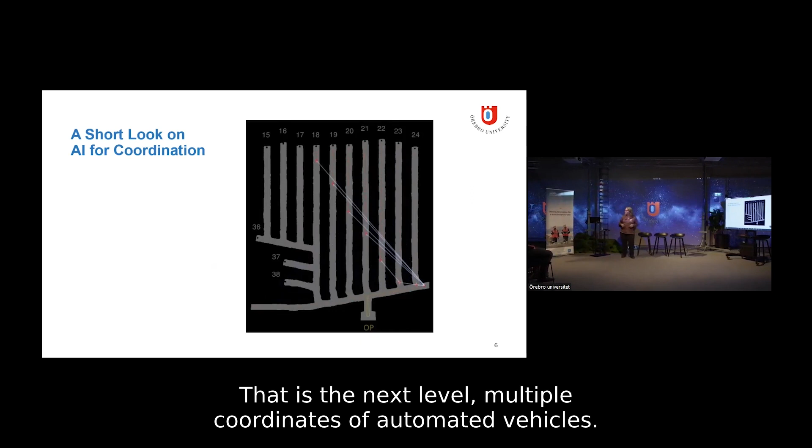Now that's the next level. You coordinate multiple autonomous vehicles. And the principle behind that is actually some kind of dynamic geofence. You predict where each vehicle will go, the envelope. And with this prediction, you know where every vehicle will go, you can identify conflicts, and then you can tell at the local level: you have to wait, you can go.

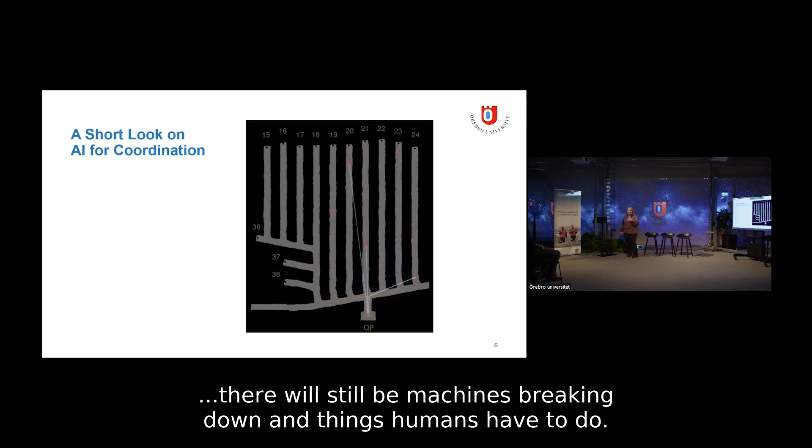So, I think I will end with that. Here you have the autonomous vehicles of the first panel, and you have the human factors and involvement of the second panel. My last word is basically: enjoy the workshop.

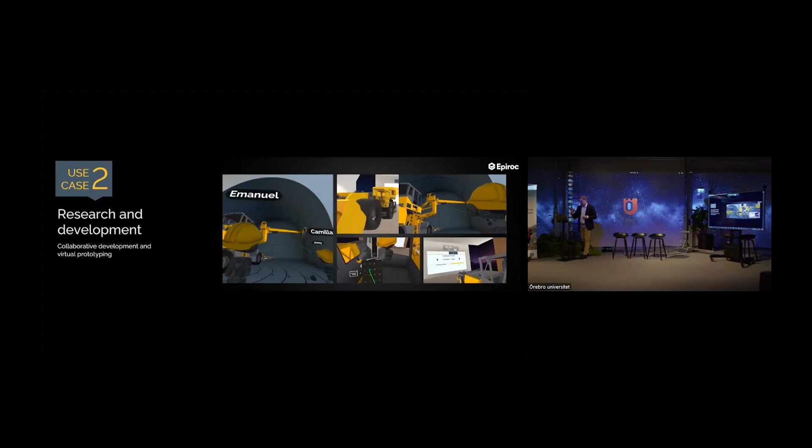Then we saw, why can't we use this when we develop our new products? So this is actually, you can see it a little bit, a new product for us. We started to develop that one in VR before we even made any kind of CAD development.

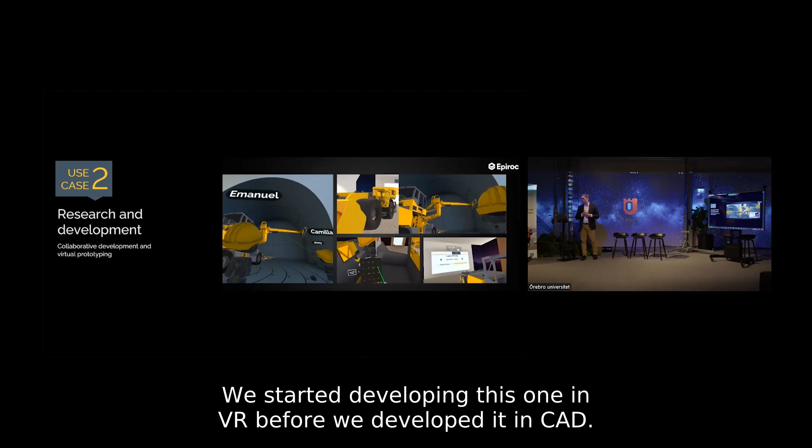The benefit from this is you can collaborate wherever you are. So we have teams from the US, from China, from India, collaborating with teams here in Sweden. We can also try out a lot of different concepts.

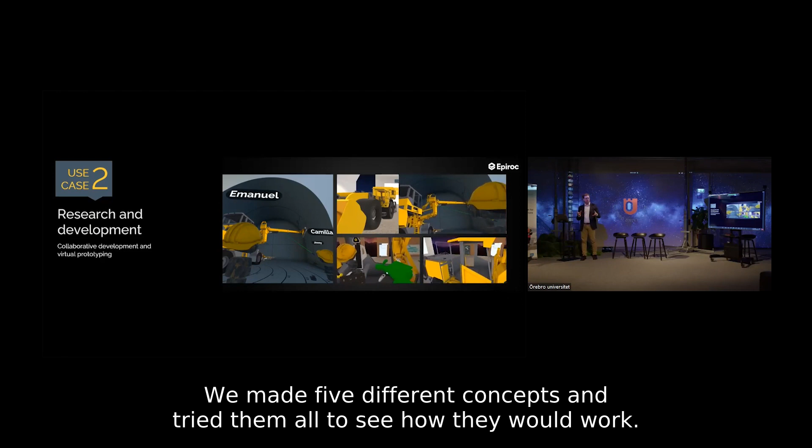That's what we did. We created a number of concepts. For instance, for the cabin, we made 5 different concepts and tried them on the machine to see how they would work. 4 were a bit traditional, and the 5th one was wild and crazy.

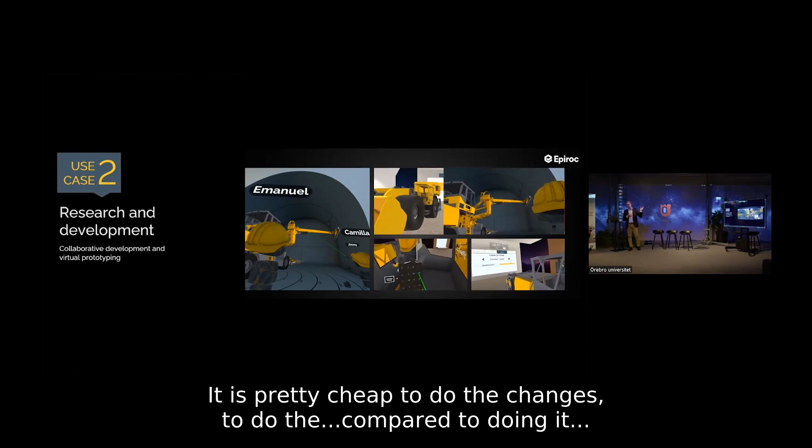So we tried it, and now that's the one we are doing—wild and crazy. We would never have dared to do that if we hadn't tried it. It's pretty cheap to do the changes and concept tryouts compared to doing real hardware. We still need a hardware prototype, but it helps with getting everything right the first time.

What we could also see is that the innovation level rose when trying out concepts this way. The people working on the project came up with a lot of new, fancy, great ideas that we are actually implementing now. They all say they would never have dared to do that if they hadn't done it in VR first.

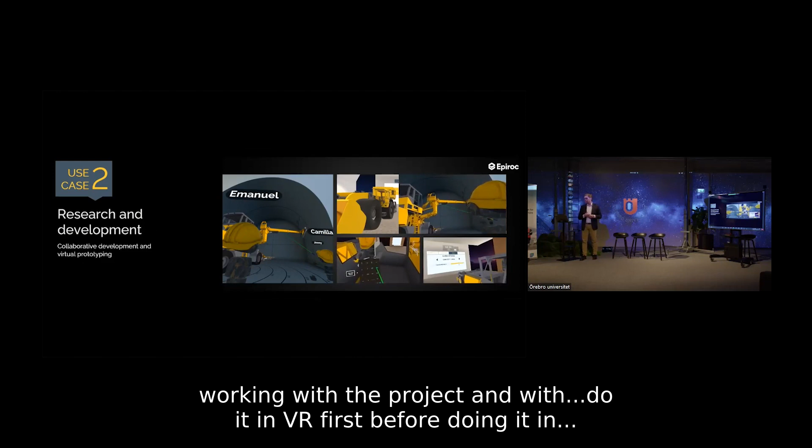And that's a bit tricky to do, especially on a distance teleremote. So what we did here is use the video stream that we have on the machine. We also had a high definition LiDAR that scanned the mine very thoroughly, and a high-speed update that creates a digital twin of the mine in real time. Finally, we also added some AR features to help the operation, and all of this is overlaid on each other and shown in VR, the virtual reality.

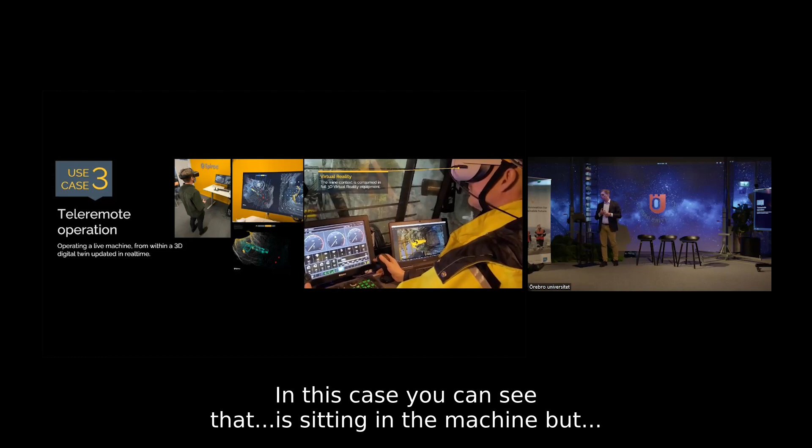I cannot show that thing. There are some secret features in that one. So we'll have it shown some other time.

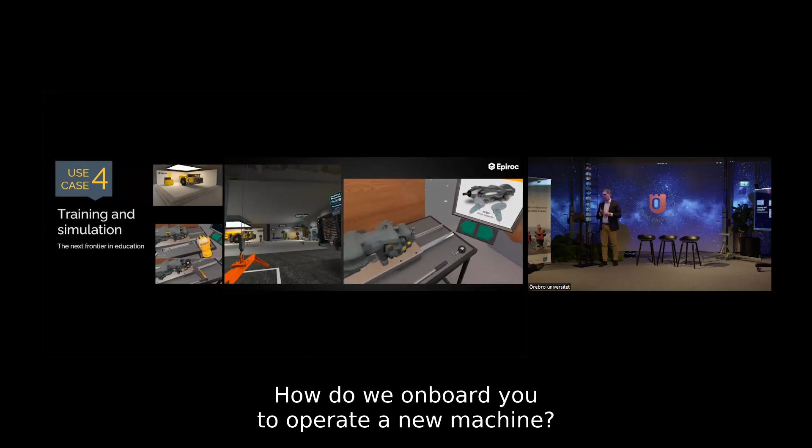Finally, and this is where we right now have a lot of interest, is training, of course. We can see that there's lots of interest, both internally and from our customers, for onboard training. How do you onboard a new operator into a new machine? Because the machines our customers are buying are in production, so it's difficult to get access to the machine.

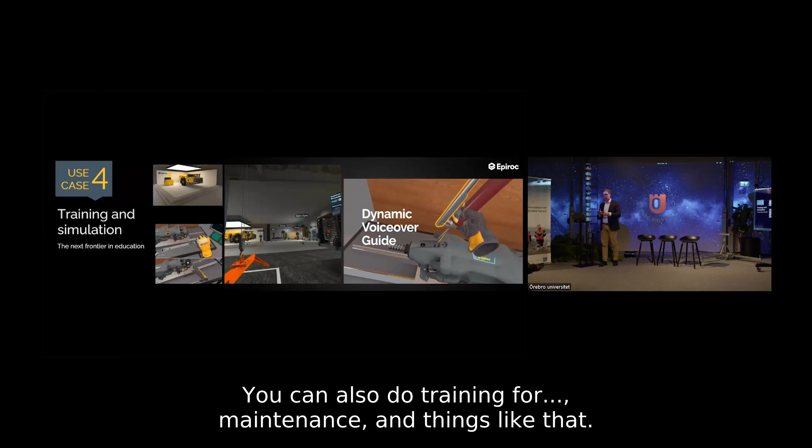And then you can do the onboard training virtually. You can also do training for daily maintenance, vehicle maintenance, monthly maintenance, and things like that. And also for the service technicians, how do I do the service operations? You can do that training in the virtual world.

The one you see in the middle there is a battery swap, how we swap the battery in our ST14 machine. Some of our customers have tried that. They say that the people who have done this training go directly and make the change without any training.

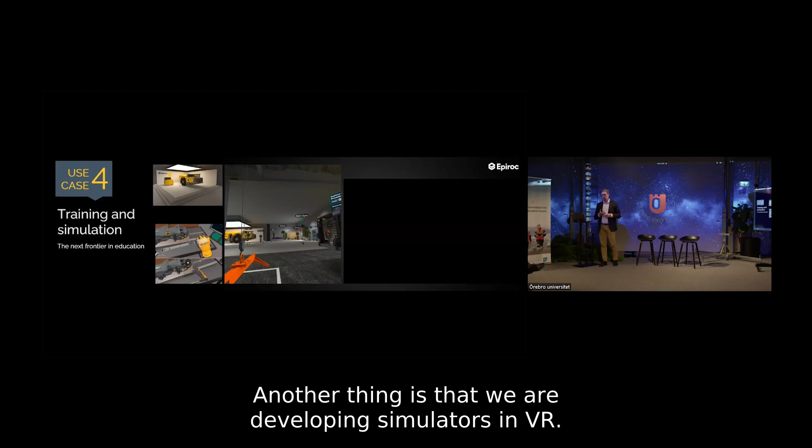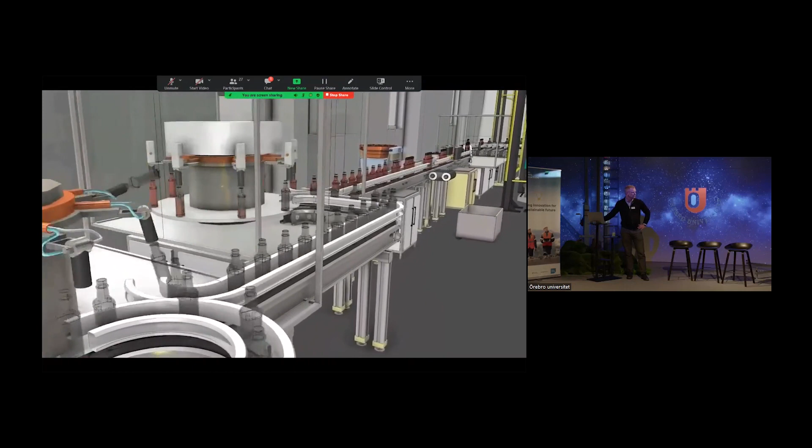So these kinds of projects we are bringing to the small and medium enterprises in the region, even with what Epiroc is doing, with all those things. So we're establishing this with 5 more nodes in Östra Mellansverige, and in Växjö also we have one.

We are doing pilots like this. We've done 20 of those pilots for different companies. We also do education, experience and competence activities, workshops together with companies to strengthen them. And also the hardware - we can offer visualization labs, displays, and a visualization center project.

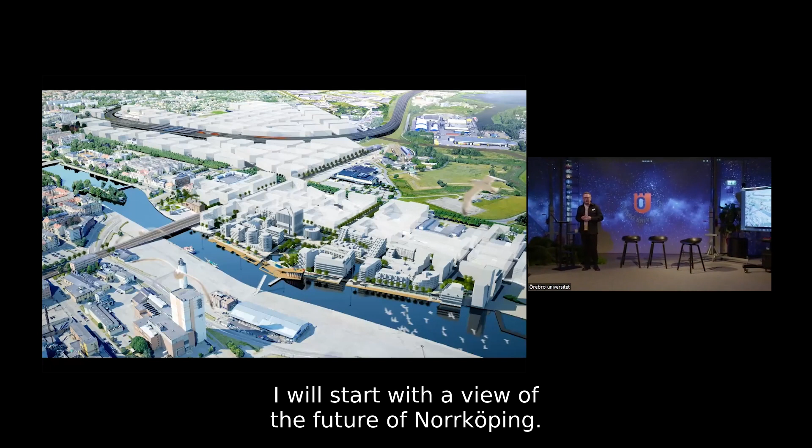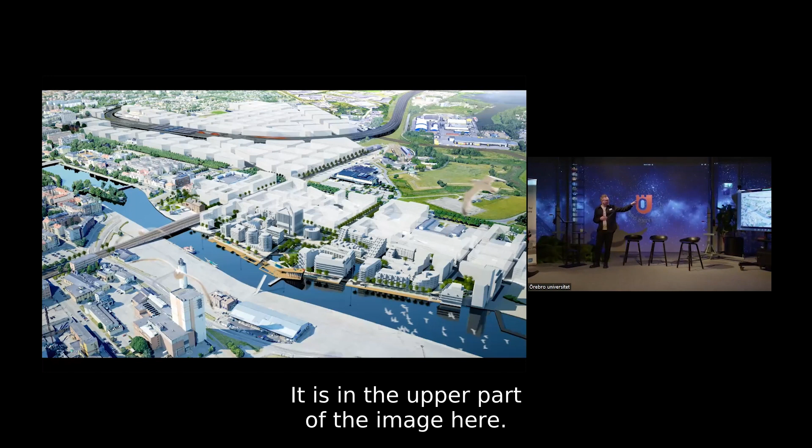Digital Twin of Norrköping - it's a project, it's ongoing. I will talk a little bit about the crossing point where AI meets visualization. I will start with a view of the future of Norrköping, the city of Norrköping. Like many cities in Sweden, Norrköping is growing, mainly because of that new high-speed railway, Ostlänken - that's the part in the upper part of the image here. And in the lower part is the first phase of that new development, called Empower.

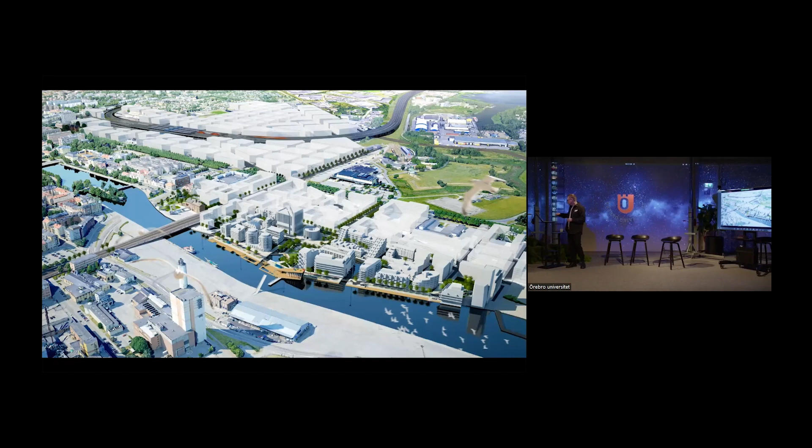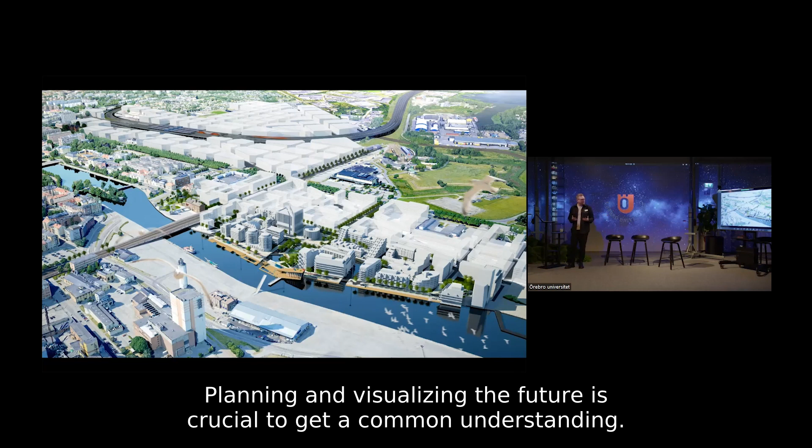Working with urban planning, visualization, and to visualize the future is crucial, and to get common understanding. But when you work in urban development, you cannot avoid handling the past in many ways. In this particular site, there has been a gas plant, located there to give light to the city and also for the city's factories.

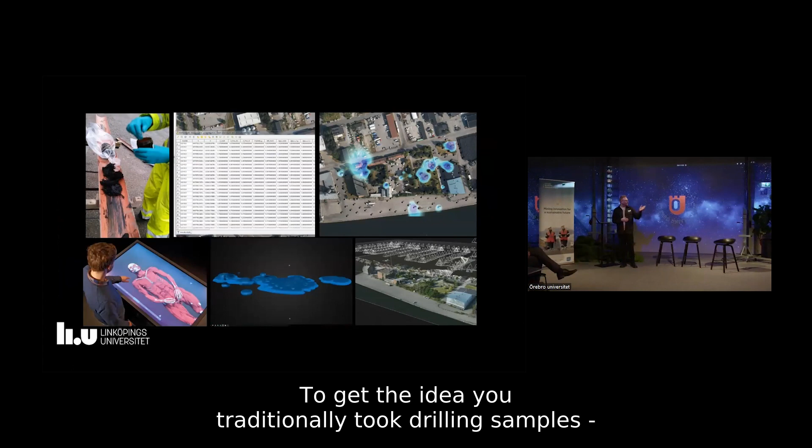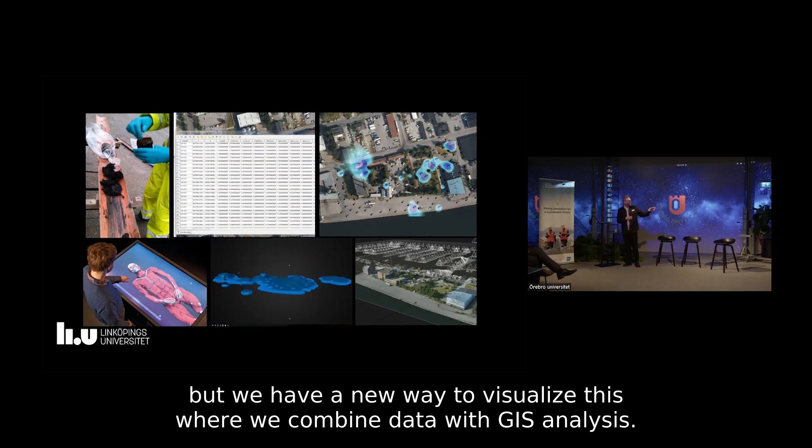There is some complexity to understand how this is spreading underneath the ground. To get an idea of that, you take drilling samples. We take a new way to visualize this where we combine data and do GIS analysis, but we visualize it in a way traditionally used for human autopsies in a virtual way. So we use the same medical technique to visualize how pollutions are spreading under this area.

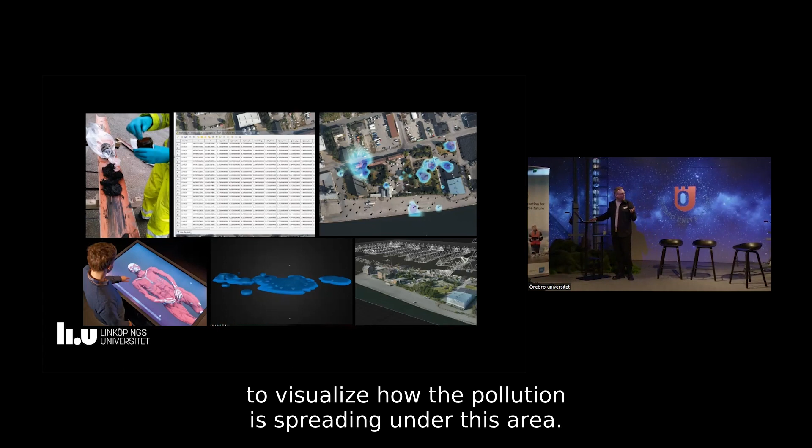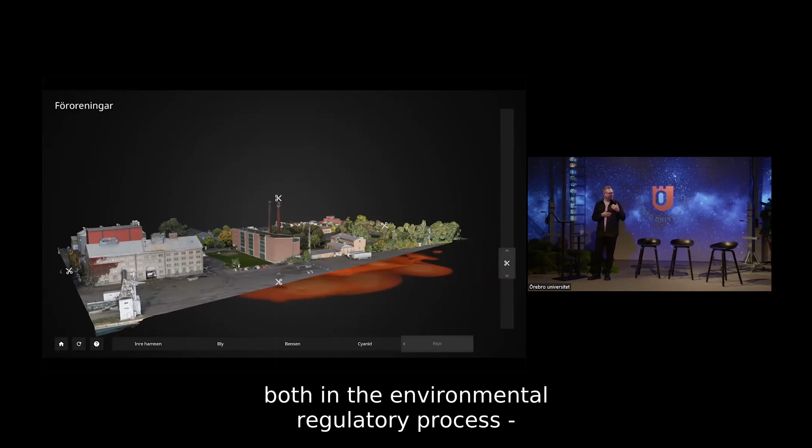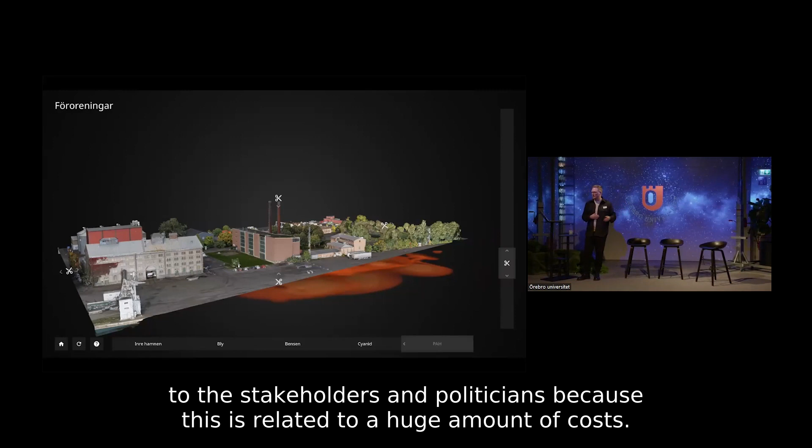In the end, we get this interactive way where you can virtually autopsize the earth and take a look at what's down below, what's hidden there. This helps to get a common understanding, both in the environmental regulation process and to the city stakeholders and politicians, because this is related to a huge amount of cost. So that's one way of working with visualization to get a common understanding about what's underneath the ground.

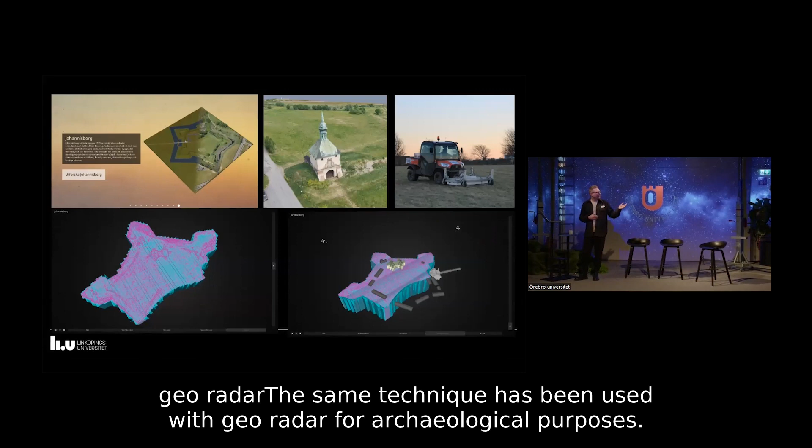And the same technique has been used with georadar, for archaeological purposes. That's also really important when you develop the city. You come in contact with archaeological sites, and that's also related to a large amount of costs. You need to be more precise about what areas you need to start digging and doing examinations in.

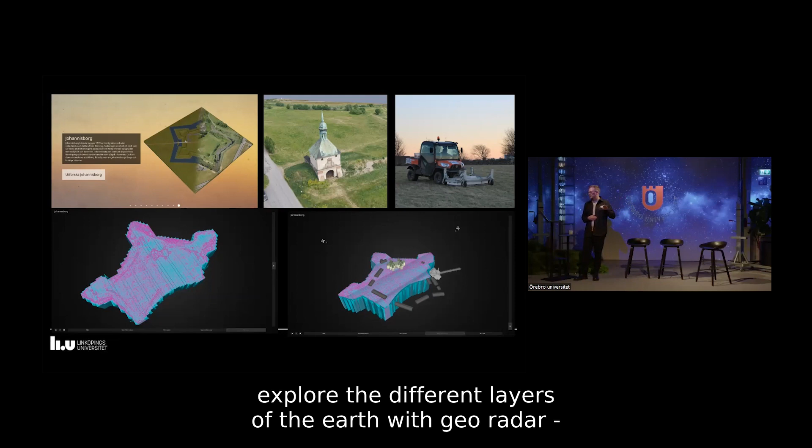We've supported that workflow by visualizing and being able to explore the different layers of the earth with georadar. You can visualize that in 3D, combining it with road inventories as well as historical models, so you get a really clear image of how these different layers relate to each other.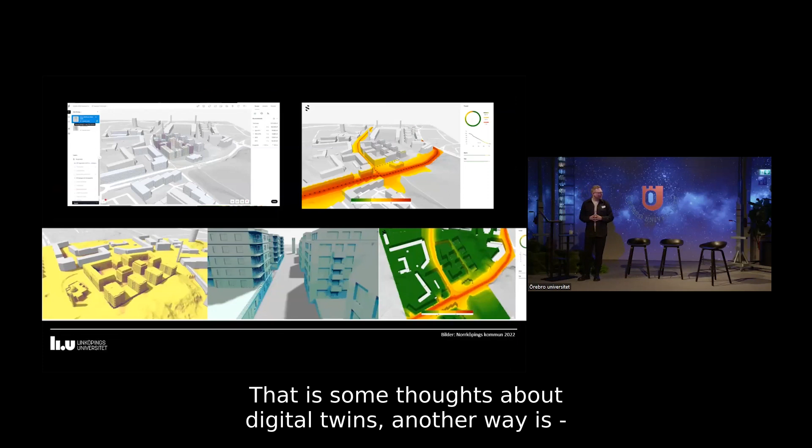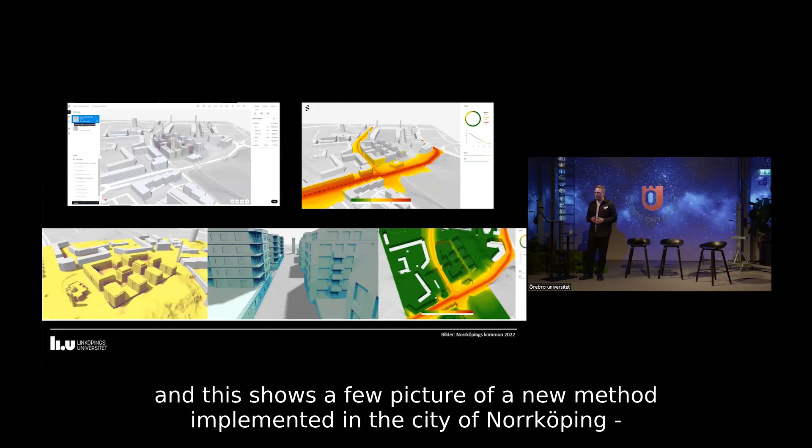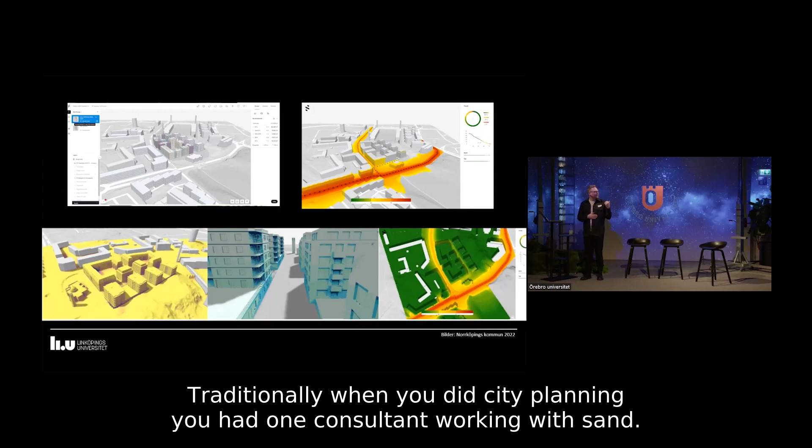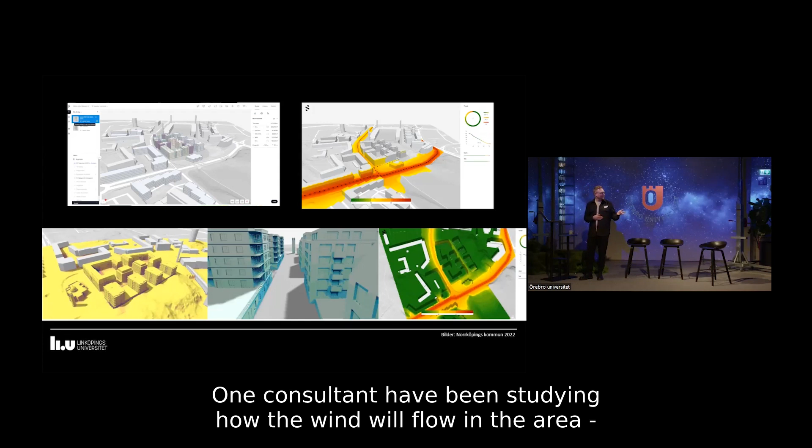And that's some part of digital twins. Another way is working with digital twins as a way to develop the future city. This shows a few pictures of a new method implemented in the city of Norrköping in urban planning, where, besides how city planning has traditionally been done—one consultant working with how an area will be affected by sound or noise from roadways, one consultant studying how wind will flow in the area, and a third studying how sunlight will be affected in the area—

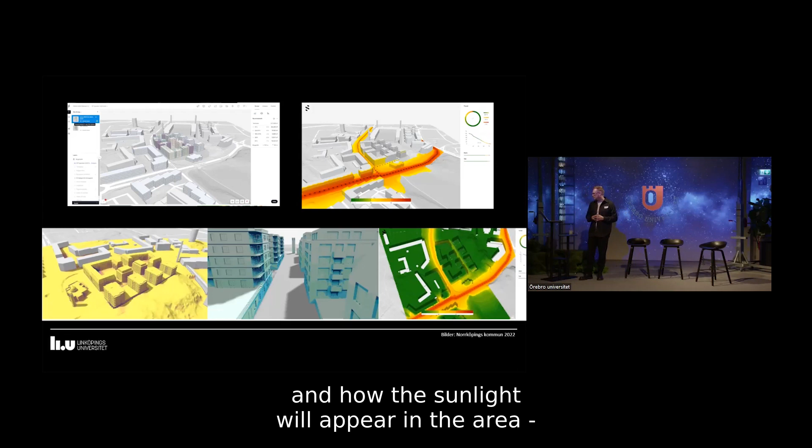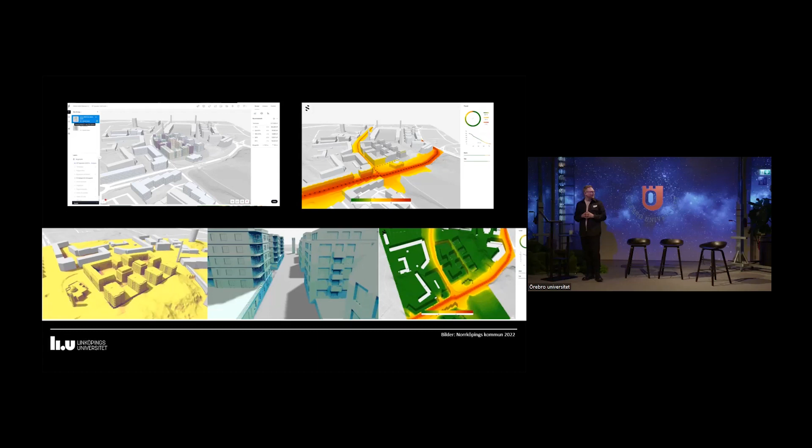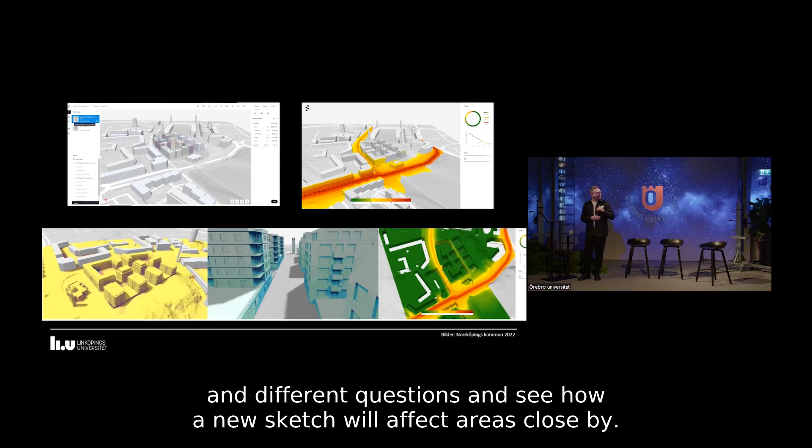new AI-powered tools help us analyze these different questions in real time and see how a new sketch will affect close by areas. This is where I think digital twins really show their strength, where you can ask cross questions.

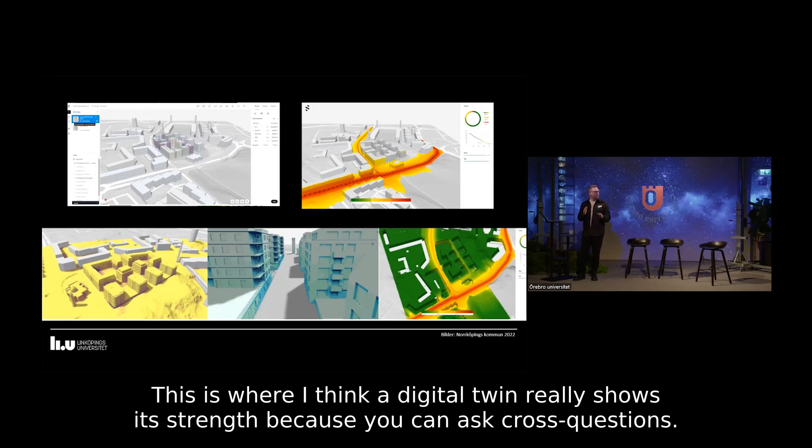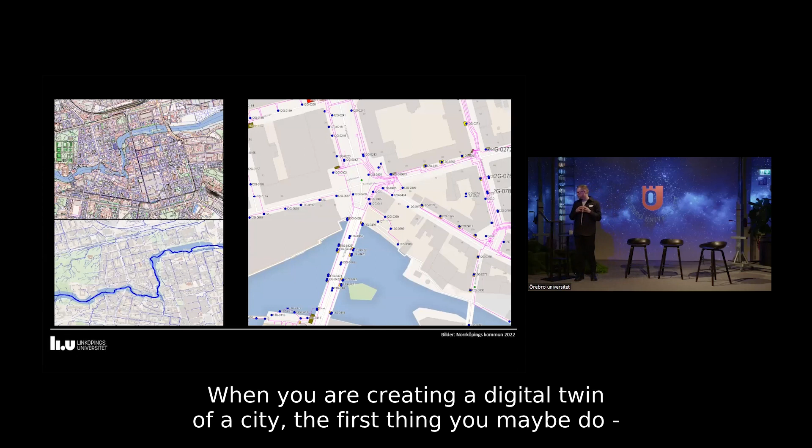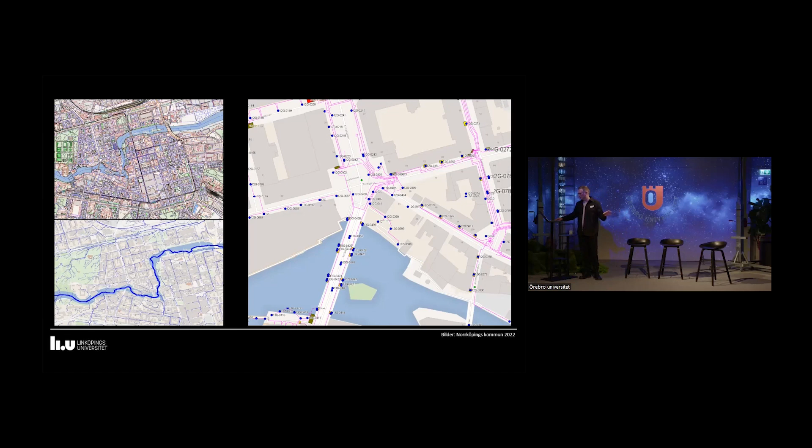When you're creating a digital twin of a city, the first thing you maybe do is take part of the city's data, data owned by the municipality, and that data is really high detail—from overall overviews to really detailed data. The right image here shows every lamppost, and you can click on those blue spots and see what kind of lamp there is and when it has been exchanged, and so forth. So it's a really complex data set, but it's hidden deep in the municipal world, not publicly accessible.

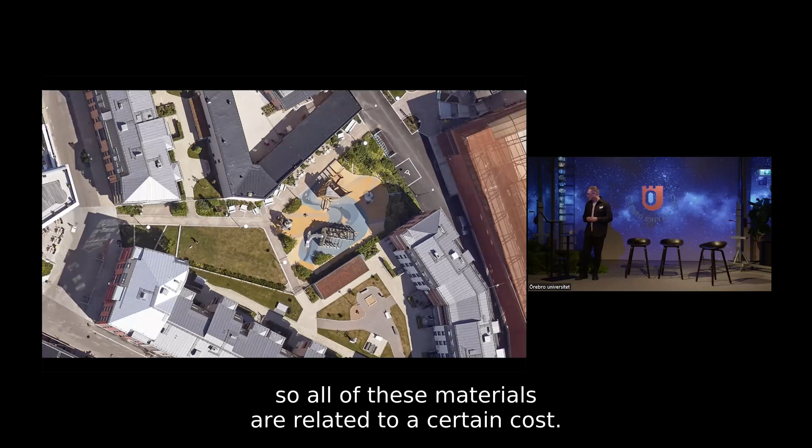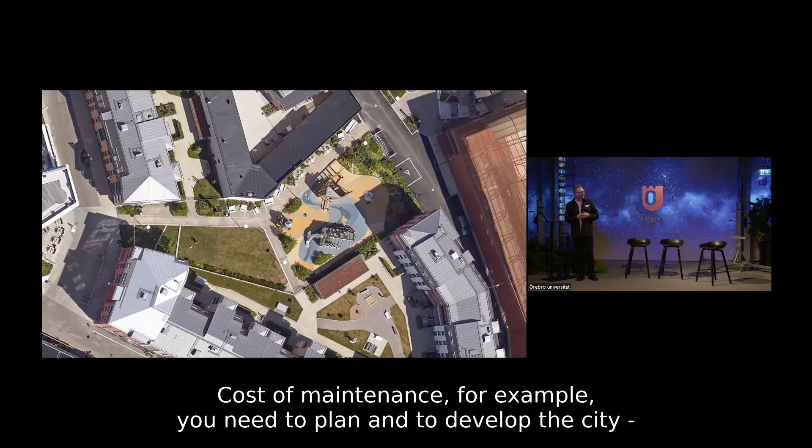Another geodata that is common around municipalities is images, airborne images. When we see this picture, we see a lot of information—grass, asphalt, a playground, and so on. All of these materials in the city are related to a certain cost, a certain cost for maintenance, for example. To plan and develop the city, you need a great knowledge of the city's different materials.

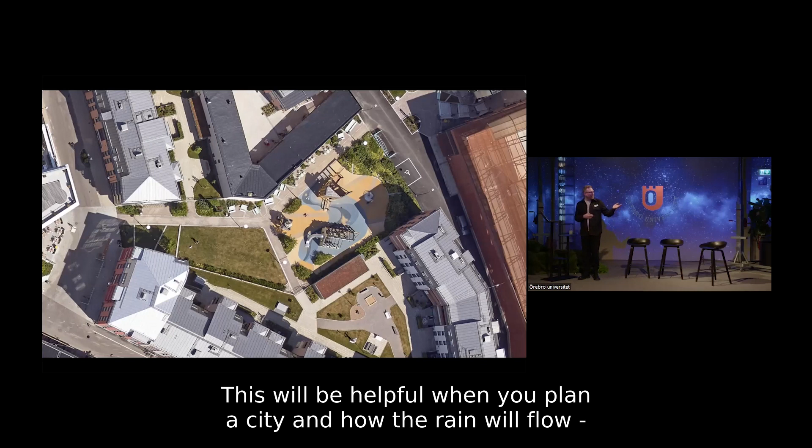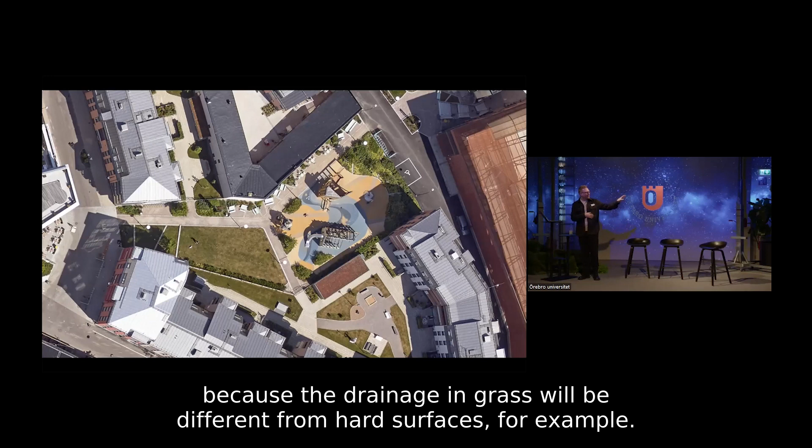This can be helpful when you plan a city, for example how the rain will flow, because the drainage is different in grass than in hard surfaces. So you need that understanding. That's what we do in the project SimStart—we try, in different ways, to quantify the city using deep learning and neural networks.

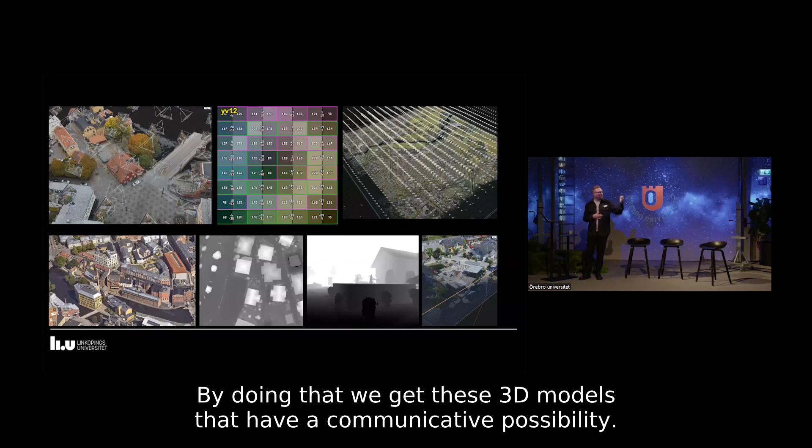We take all of those images of the city and align them so we know exactly where every pixel in every image is in the physical world. By doing that, we get these 3D models that have a communicative possibility, and we also get the depth in every image.

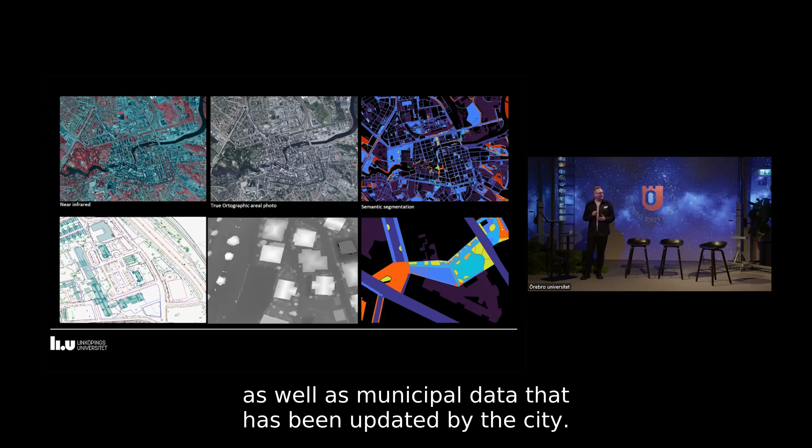That really helps us when we train our neural network. We have a stack of different image inputs—near infrared, ortho photos—as well as municipal data that has been updated by the city. That's what we call the ground truths, what we compare our network towards. So we train our network on that.

So that's what we are fine-tuning our network at the moment. We put in all of these layers and compare them to the truth, how we perform against it. We evaluate different types of networks and see how fast they perform. At the moment we are using ResNet 50, Deep Lab, ResNet 50.

We see that when we introduce, for example, depth in the image processing, with just a few steps in the training process we can get a really, really good result. That increases the speed by at least 10 times. We can also see how we perform in different classes and so forth. This method will be used to create the digital twin of Norrköping, so we can extract this and turn it into new geodata.